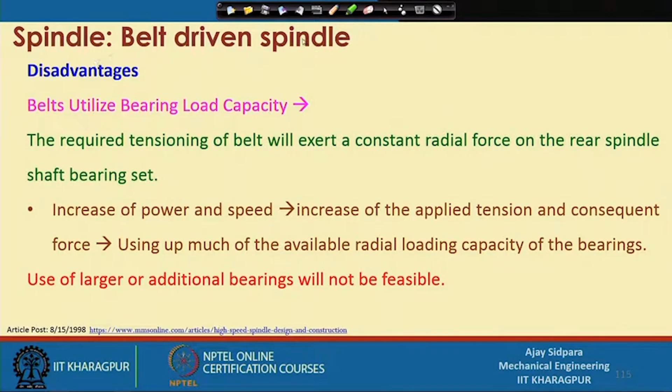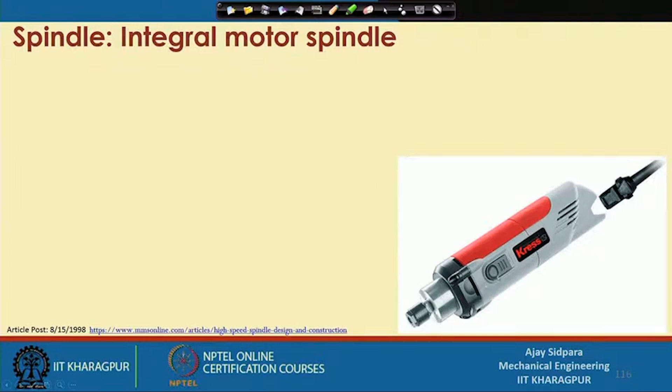Now coming to the spindle with the integral motor. These are spindles where the spindle motor and whatever is required for movement of the spindle shaft are all integrated in a single body, so you do not require any belt drive or other mechanism to transfer the motion.

An integral motor spindle does not rely on an external motor to provide torque and power. You just require one power socket, since the motor is inbuilt. Even if you are adding something like a rotary encoder, that is also inbuilt within the system. So everything is very compact and you can easily mount it in a small location in the machine tool.

The motor is an integral part of the spindle shaft and housing assembly. The problem here is that you have to prepare a housing for this motor spindle, because in the belt drive spindle the motor was located at a different location, so the housing was not connected with the motor.

But when using an integral motor spindle, you have no provision to change the motor or any component, unlike some of the advantages we saw in the belt drive spindle. Those advantages are not available for the integral motor, because it is a single body, and whatever specification is there, you cannot change it by altering any component, since all components are designed with respect to the full body.

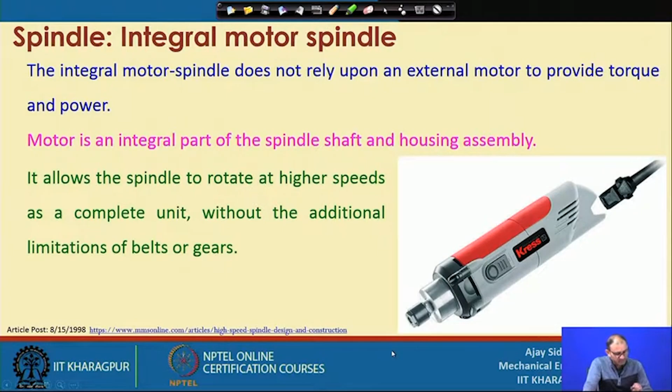It allows the spindle to rotate at high speed as a complete unit without additional limitations from belt and gear. That is one of the advantages we extract from this integral motor, so our requirement of very high speed is fulfilled by the integral motor spindle.

The spindle shaft is held in position by a set of high precision bearings. It is up to us how many bearings we want to use, because the number of bearings increases stiffness. Instead of a single bearing, you can use more than one bearing to get more stiffness in terms of radial and axial loading.

But the minimum requirement is that you have to put bearings at the front part as well as the rear part, because the shaft undergoes two different types of loading: one is radial loading, and the other is thrust loading, which is along the axis of the shaft.

You have to choose the precision bearing, because there are different types of bearings available. Ceramic bearing is one of the latest, which mostly people are using in high speed bearings. But other than ceramic bearing, we have angular contact bearing, cylindrical roller bearing also available. So those things are there.

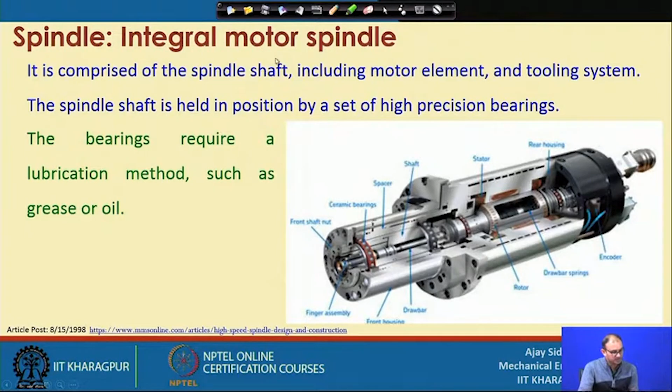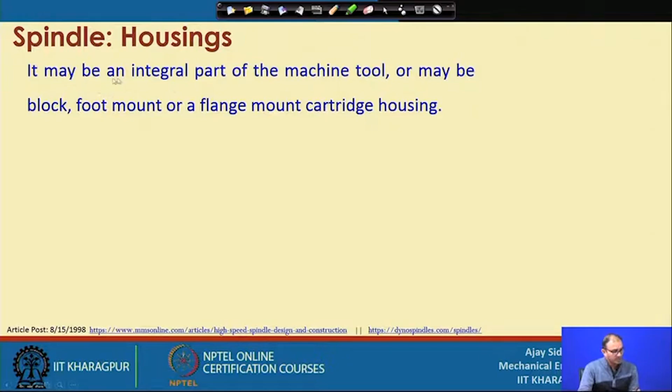So this is the integral motor spindle. Now coming to the housing. What is the housing? The housing is the thing where you are putting this integral motor spindle into it. So it may be an integral part of the machine tool, or may be a block, foot mounted, or flange mounted cartridge housing. So now this is what we are talking about as a housing.

Sometimes it is an integral part of the machine tool. So if you know which particular spindle you want to use, you can put this thing as an integral part. So you do not require any type of additional assembly here. And once you reduce the assembly, we know that wherever there is assembly or many parts, chances are high that it will loosen at a later stage. So it is better to make a monolithic structure, to reduce the number of joints, and at the end it will increase the stiffness of the machine tool also.

So sometimes it is like that, or sometimes you put the block or flange mounted cartridge housing type of thing.

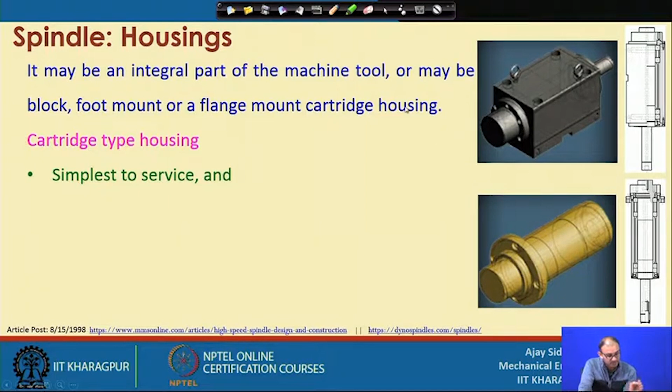It is simple to service, because in the block type, you first have to prepare a block and then create dimensions as per the size of the spindle. But here, since both parts are cylindrical, it is easier to make a cylinder compared to a box, because you only have to turn it, and whatever dimensions or tolerances you need for this particular thing will be achieved in a much greater and easier way. So tolerances required for high speed are easier to obtain.

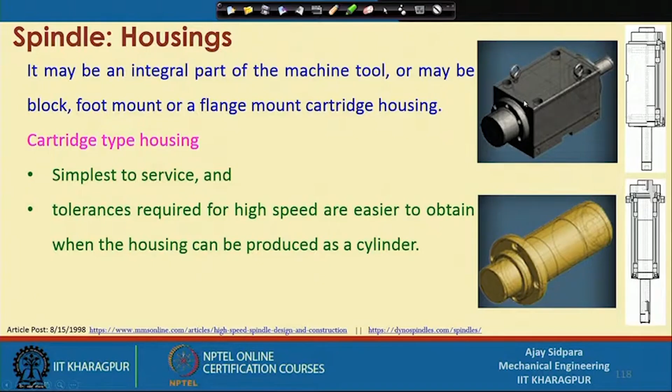When the housing can be produced as a cylinder, you can actually create very fine surfaces, and whatever requirements you have for this particular housing, you can easily achieve in the cartridge type housing. So there are some advantages associated with this, and mostly people go with cartridge type housing compared to the other type. But this is mostly for heavy duty operations, not considered for micro machining operations.

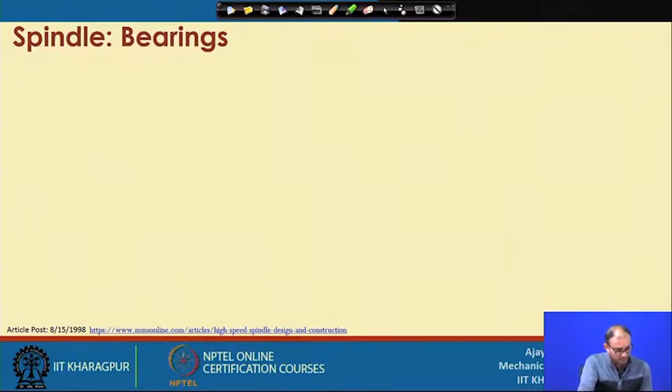Now coming to the bearing, because as we have seen in slides before, bearings play a very important role compared to other components, because wherever you want to transfer motion from one body to another without much friction, the bearing is very important so that it does not create problems during transmission or power losses. So it is one of the most critical components of any high speed spindle design.

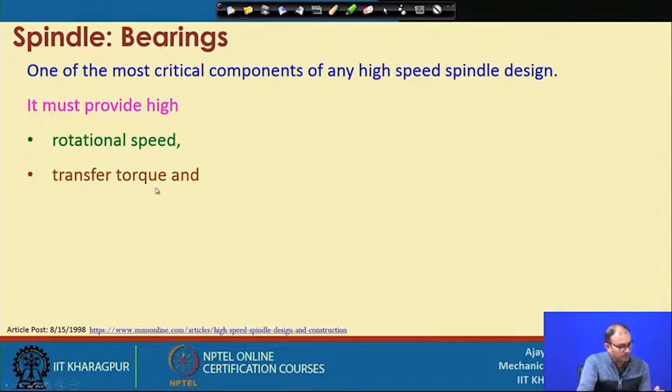So what do we need from the bearing? It should provide a very high rotational speed, because our tool diameter is very small and we have to maintain productivity. And it must transfer torque, because torque is also important when drilling to a very high depth, and if you do not have sufficient torque, the motor will be jammed and you will not be able to rotate the spindle at a reasonable speed.

And power to cut with the cutting tool, because when you talk about high power, you are mostly talking about high torque. A low power motor has low torque but high rotational speed. So these are the things, and the bearing must be capable of reasonable loading over its complete life, because if you change any of these parameters, the life will be sacrificed, since you are not maintaining something within the specified allowable limits.

You also have to consider the loading, because if your spindle is designed for a soft material, that means high RPM with a very small depth of cut. In that case you can use it easily. But if you increase the depth of cut beyond a certain limit, the tool will experience more loading, be it thrust loading or radial loading, and it will exceed the allowable limit of that specific bearing, resulting in bearing failure or other problems.

So the bearing type used must be consistent with the above demands, or the spindle will not perform. Whatever we want to get out of this particular spindle, we have to think about which type of bearing will fulfill the requirement with a reasonable amount of allowance, because some requirements are contradictory to each other. So you have to reach a compromise position where you are not losing much, but you are gaining something required for your application.

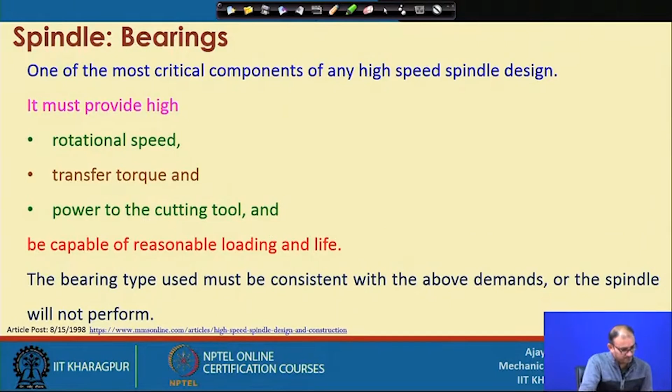So what are the selection criteria? First, what is our requirement? Then we select which bearing we can use, and see what the design impact is. If you are looking for high speed, you have to go with a small angular contact bearing. The design impact of this is that your shaft will be small and the power will be very low, because when going for high speed, if the shaft is very large, there is an inertia effect.

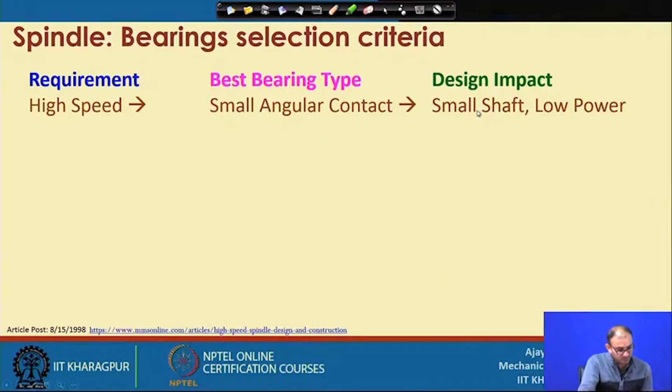So, you have to rotate a very heavy object to a very large high speed, and at that time it will create issues at the time of acceleration and deceleration. Low power is required, because if the shaft is small, you do not require very high power, and similar for the high speed. So, this is one of the things.

Now, if your requirement is high stiffness, that means when it is going to operate under some type of aggressive machining, like depth of cut is very high and material is very hard, at that time you need high stiffness, because you do not want your bearing or spindle to actually loosen up.

Or what we can say, it will deform internally because of external forces. So what we need is a large roller. A large roller will help you take care of all the external loading, and it will not deform itself. But if you use a large roller, then inertia effect and centrifugal force effect will come, so you cannot go with high speed. So your spindle design impact will be low speed and large shaft.

So it is exactly opposite to this particular part. Now you can see that stiffness and speed, both cannot be matched together. So obviously we have to compromise with one particular location where both things can be reasonably good within the limit.

If you are talking about axial loading, that is mostly in the drilling operation. So when you do drilling, we know that we are just pushing the drill from top to bottom only, we are not moving in the sides. So that is called axial loading.

So at that time we have to go with a high contact angle. I will discuss in the next few slides what the contact angle is and how it impacts axial loading. When you are talking about axial loading, the speed will be lower, because when you increase the speed, the ball will try to escape in the radial direction, but you do not have more loading or more stiffness in the radial direction.

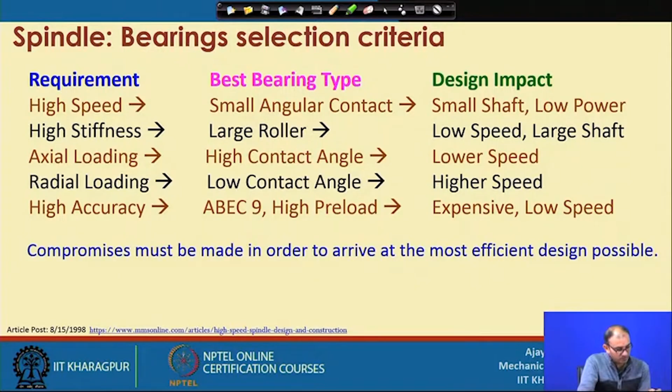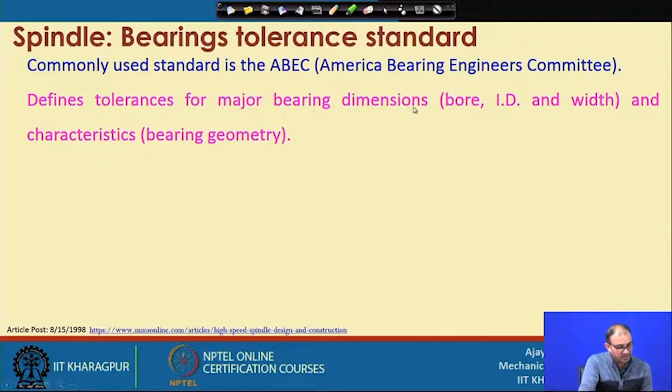Now, this is the tolerance standard. The commonly used standard is the ABEC, America Bearing Engineers Committee, and it is also equivalent to the ISO and DIN standards. It defines tolerances for major bearing dimensions, that is bore, inner diameter and width, and the characteristic, that is the bearing geometry.

So what things are there? If you are talking about ABEC 1, it is mostly a general purpose bearing, because here we are not making very tight tolerances, so it doesn't become very specific. But if it is general purpose, then what you need is interchangeability. Suppose you want to change a bearing which is not operating at a particular level, then you can change it. So if it is ABEC 1, it is very easy to get a replacement without any problem.

If you go with ABEC 9, that is a high precision bearing, suitable for use in high speed spindles. So here our requirement is very high precision, and we have to rotate it at very high speed. So in this particular case our target is ABEC 9, but as you go up in number, 1, 2, 3, 4, 5, 6, 7, 8, 9, your requirement cannot be general purpose. You have to focus on one particular part only, meaning you don't have so much interchangeability, you have to go with the same bearing you want to replace.

So how can you decide which one is best for you? When you are actually making a spindle bearing, geometric accuracy should be ABEC 9, because our requirement is very high precision, we want to minimize the run out and maintain rotational accuracy. So minimizing run out is very important, we have to maintain rotational accuracy also, because we don't want it to rotate in any way other than concentric rotation. So this is for the geometry of this bearing.

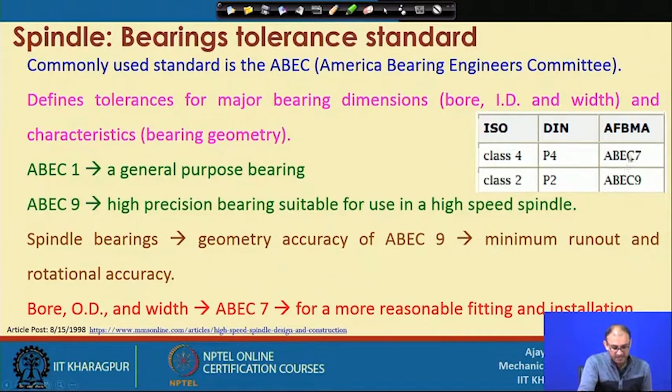So it is better to go with ABEC 9 accuracy when talking about spindle bearings and such. But other than that, when talking about dimensional, that is geometric point of view, it is better to go with ABEC 7, which allows more flexibility in terms of fitting and installation. These are the equivalent standards: class 4 and class 2 in ISO, and in DIN standard it is given by P4 and P2, and this is what we are discussing right now, ABEC 7 and ABEC 9.

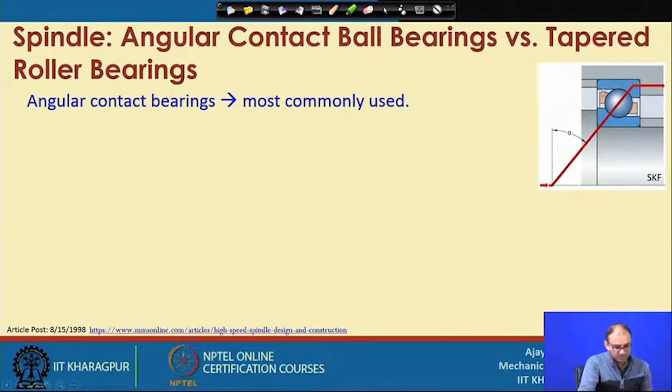Now, these are the two different types of bearings which are routinely used for high speed spindles, that is angular contact ball bearing and taper roller bearing. So what is this angular contact ball bearing? This is the commonly used ball bearing and is most commonly used for different applications. They provide precision, load carrying capacity and speed required for metal cutting spindles. Why do we call it angular contact bearing? Because this particular contact is at some angle, so that alpha angle is the contact angle. So we have seen high contact angle and low contact angle.

So this is the particular angle at which you are putting, that means where is the contact between the ball and the race, that particular line will tell you this angle. We will see in the next slide more detail about this.

Then the taper roller bearing, now we know it is a roller bearing, so the shape is roll type, not ball type, and it is a taper. There is a taper in between these two. What is the advantage here? You get a high load capacity and greater stiffness over the ball bearing. Why? Because here your contact is at a very small area, but in this case your contact area is very large. So the bearing will actually take more load, and that is the reason it has a high load carrying capacity, and stiffness is also very high, because the size of this particular thing is very large, so your per unit force will be very less in this case. So your stiffness is very high compared to the ball bearing.

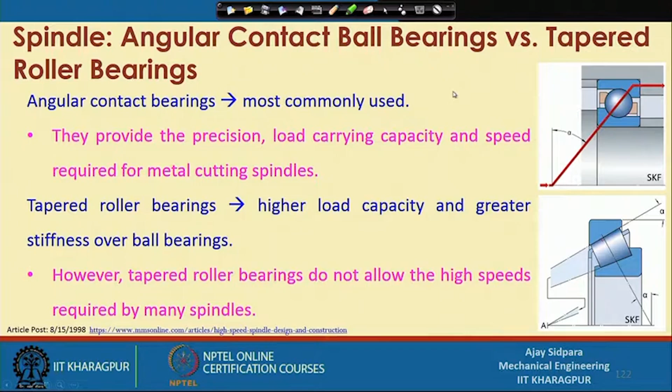So this is the angular contact ball bearing. It is designed to provide both axial and radial load carrying capacity when properly preloaded. This is the preloading. I will talk about these things in one or two slides later.

So where do you need both things? When you are talking about axial loading, consider this is a shaft and the bearing is located here. When you are getting a force here, consider your tool is located here. This is the tool, and consider it is a drill, and this is your workpiece. When you are pushing this thing inside, what happens? You get one force, that is called thrust force. So this is the axial force.

Now consider that this is mostly for the drilling operation. Now again consider you have a shaft, but instead of drilling you have a milling cutter, and this is your job. Now you want to create one pocket here, this is the pocket which you want to cut out of it. So first you are plunging this thing up to the depth. So when you are plunging, at that time it will create axial loading.

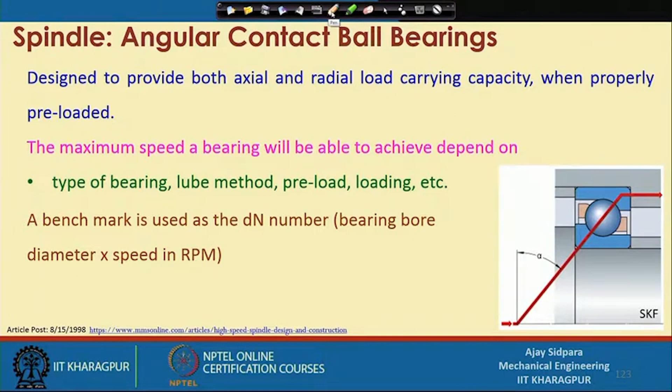So this is the thing: higher the DN number, higher is the RPM. When you are going with a higher RPM, we know that we have to use a very small shaft, because shaft dimension also plays an important role. So when talking about lakhs, I will consider the 10 lakh DN number. At that time mostly this major part is the RPM here. So if you are talking about 1 lakh RPM, what you can think about is the 10 millimeter diameter. So 10 millimeter diameter and 1 lakh RPM means you can go with a 10 lakh DN number. In that way you can actually define this.

So this is mostly what we talk about with the DN number. What is the DN number? Higher the DN number, more you are thinking about the higher speed of the spindle.

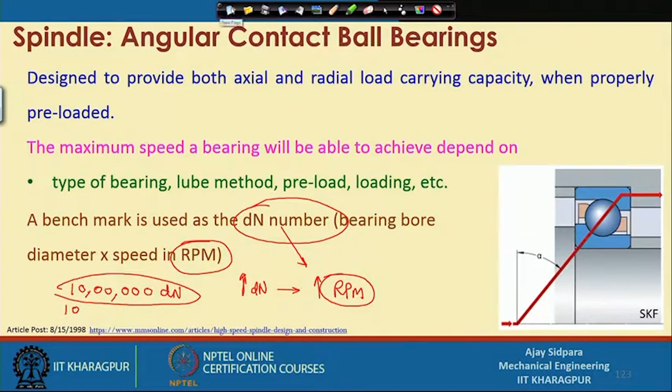So what is the contact angle here? It is a nominal angle between the ball to race contact. Where is the ball to race contact? This is the ball to race contact. So this is the ball to race contact line. Wherever this contact is, you have to draw one line here.

This is the line passing through the ball to race, and a plane through the ball center, perpendicular to the bearing axis. So this is the ball center passing through that plane, and this is the axis, the bearing axis, and this is the perpendicular line to both things. So, nominal angle between the ball to race contact line and a plane through the ball center. This is the plane through the ball center, crossing here at this location and perpendicular to the bearing axis. So this is the bearing axis, perpendicular to the bearing axis. This particular angle is called alpha.

Contact angle determines the ratio of axial to radial loading possible, with radial loading being the primary benefit here. Because when you increase the RPM, and we are talking about when it is under operation, doing milling or drilling operation, your bore will actually experience many things. One is the radial loading and another one is the axial loading. So now you have to decide at which particular angle you can actually get the benefit of both things, axial loading and radial loading. Based on that you have to select the contact angle, whichever is better for a particular application.

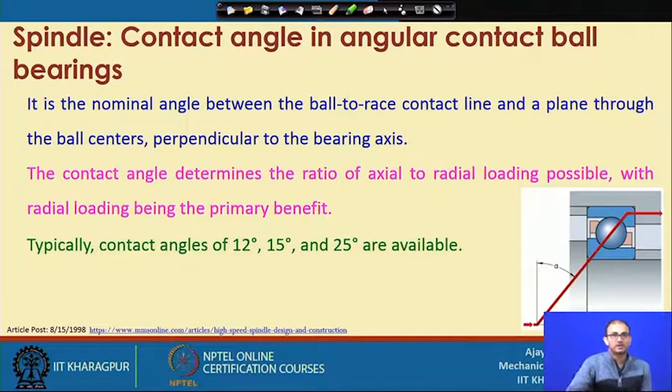So now these are the different ways we can think about those parts. This particular application will tell you how we can select this particular bearing. Let me continue this topic in the next class. We will see what different types of contact angle will create a problem for different types of loading. Thank you very much.